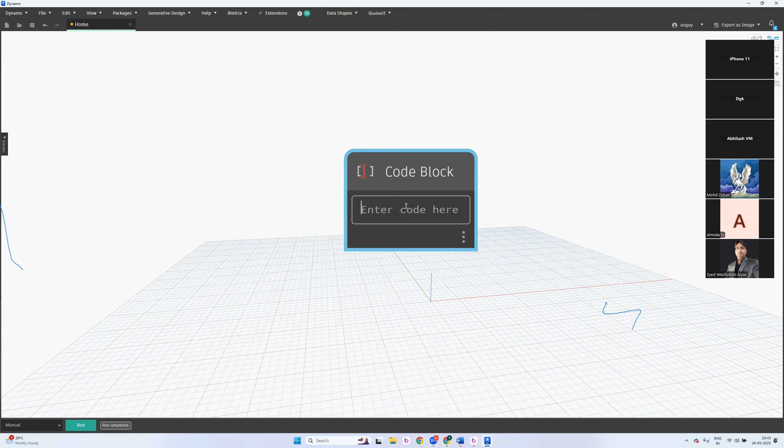Like, Rajesh, what is the logic behind this? I'm not able to do this, is there any solution? So far, from my perspective, I never say no to students for any single query. From students' perspective, they never hear no, that won't happen. I never disappoint you for any kind of concern. Sometimes I may provide you solutions for your queries as well, if I'm available.

So, 2 more minutes - what are the things? No notes, nothing, no presentations. After the training, within the training itself, I am going to share very important resource files which you can't develop yourself after the training. I'm sharing it with you like a hot cake - you just simply implement it on your live projects directly, which is worth more than a lakh. Generally companies buy these kinds of resources from freelancers, and they take almost a week to 10 days to develop these complicated scripts, 8 hours a day for a week or 10 days. So I'm sharing it with you directly, with recorded videos on how to use it and everything.

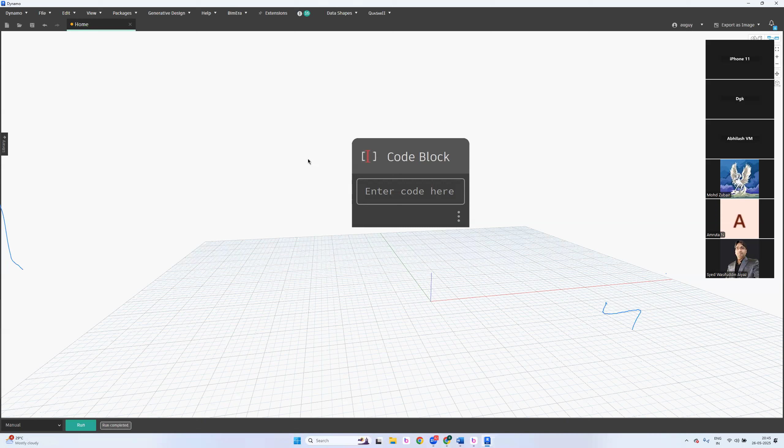I'll show you, I'll show you how to open everything. So where do you use it, where to use it, okay. I'll explain everything, don't worry. What is this, who is this, is it a paid version or a free version? It's free, it comes with the Revit installation. So don't worry about it, okay.

So are we learning from Revit or Civil 3D, or general? This is a general one - there's no different Dynamo for Civil 3D and different for Revit. The Dynamo is only one. If you learn Dynamo for Revit, you can implement the same strategies in Civil 3D as well, and if you learn Dynamo for Civil 3D, you can implement the same strategies in Revit as well.

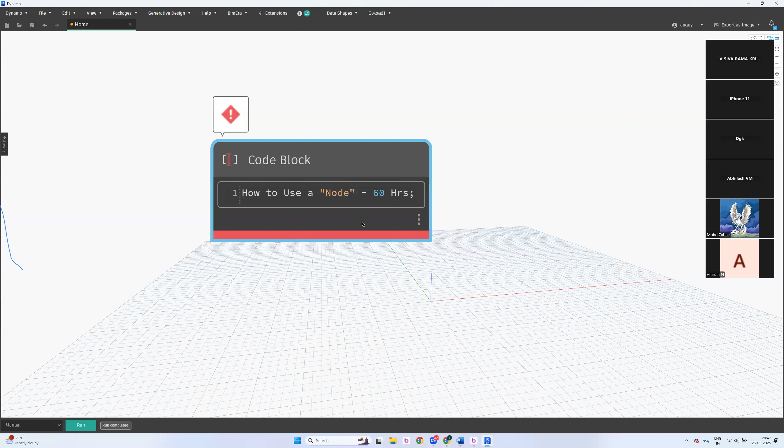So I'm teaching you a concept of how to use a node, for 60 hours. Do you believe that? I'm going to teach you only one single concept, and this concept leads to a number of sub-concepts, like 20 concepts under this. We are going to learn how to use a node for 60 hours. Try to understand how I have kept the in-depth knowledge in this entire training - one single concept you're going to learn for almost 60 hours.

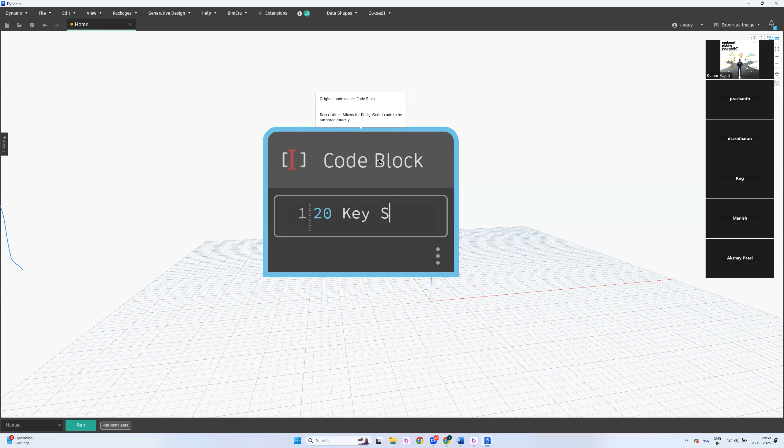So there are 20 key concepts you must learn. There are 20 key concepts you must learn.

So who is the boss for all these concepts? There must be a boss. You first understand him, then only he will allow you to play with the rest of the 19 concepts. The boss concept is data types.

The boss concept is data types. The rest of the 19 key concepts are based on the data types. This concept itself takes almost 3 days to teach you.

Actually, this is very, very basic for a computer science student. But you guys have a mechanical background, electrical background, and a few of you, I know, hate coding as well. That is the reason in Dynamo, in level 1 training, there will be no coding. Yes, we have, but it is very less code, very simple code. That's not Python, that's not C, nothing. But we have code. I'll show you how the code will be in level 1, in today's session itself. It's very, very impressive, you'll definitely love that style of writing code.

So it's called DesignScript. I'll show you some examples today.

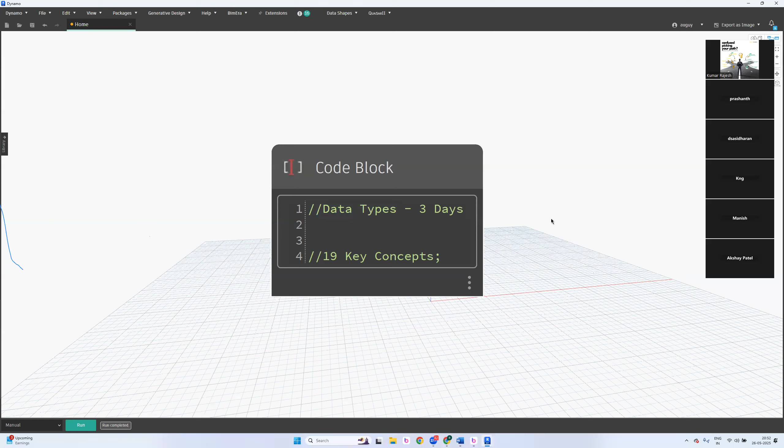So what is this data type actually? What is the data type? If you want to place an element, when I just click on any element, if I want to read the content or read a property, any data, then where can I read the data?

Is this only for Revit, or do we have this elsewhere? Is it only Revit type or instance? It's for Revit and all the tools. So it's not only for MEP, not just for architecture.

Very nice question again. Automation is not element or discipline specific. Automation is for all disciplines - architecture, structure, mechanical, electrical, plumbing, and firefighting. So if you're a Revit user, whatever your discipline, the Dynamo tool is the same for all disciplines.

I'm not just teaching you basic content again - I'm going to teach you some technical content as well. You'll come to know why, in our coming sessions.

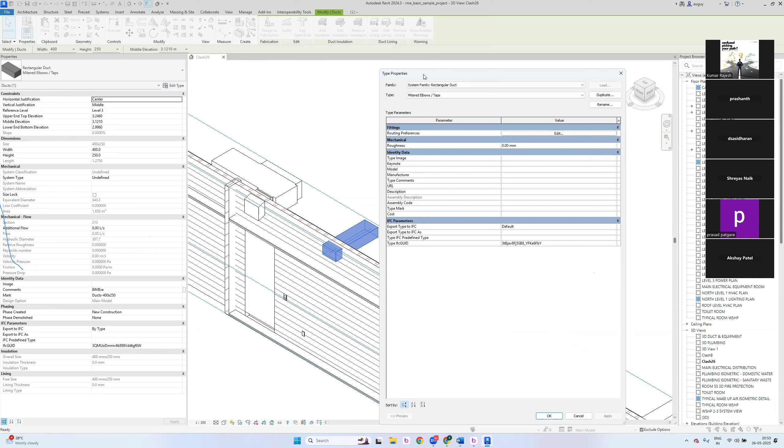So we have the properties palette and the type properties palette - this one is for instance, and this one is for type. Whatever data you read when I pick any element, it's actually not even 5% of the actual data.

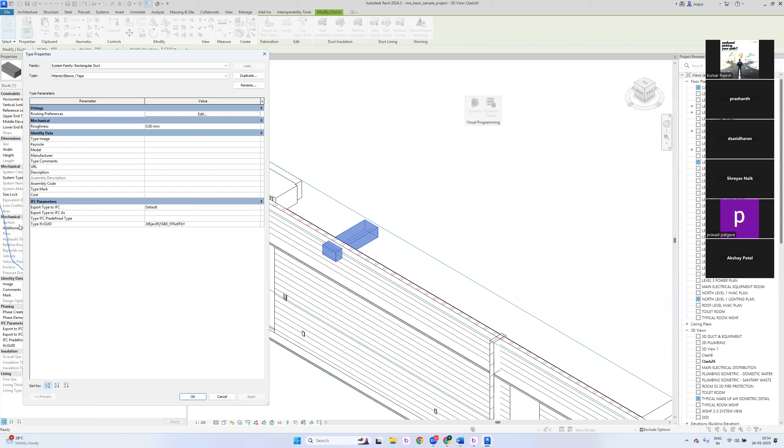Only a BIM developer can see that. Let me close this - see, maximum, how many parameters do we have? 1 through 16... maximum 20. If I count like this, from here to here it's 20, 40 - so total 60 parameters we have for one element.

But where is the real-time properties palette for a developer? For a developer, this is called the Revit Lookup Tool.

Sorry Rajesh, are you sharing the screen? Oh, I'm not seeing your screen. Yeah, we are seeing your screen - it's visible. Okay so just log out and log in again, same meeting, bro.

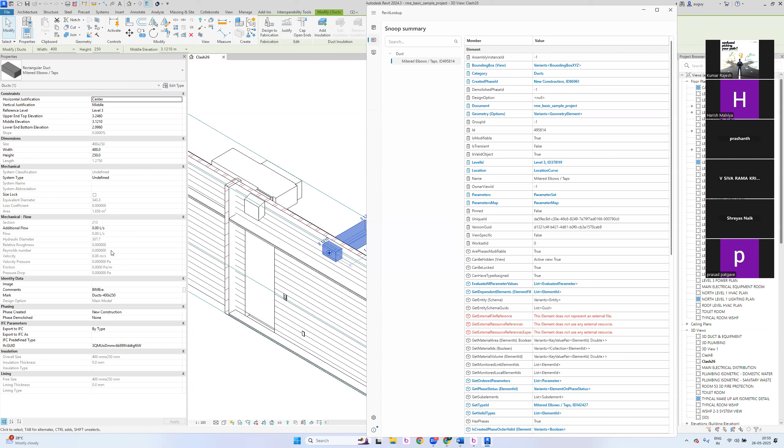So see, I don't have any - can I see the ID of an element in the properties palette? Come on, can I? No. Can I get the location information of the particular element here - the XYZ point? No. Can I get only the reference value? No, right?

So where can I get such information? Not only that, there's a number of data points. So I can see the location information - see, there is a properties palette, but this is actually a free tool again - Revit Lookup.

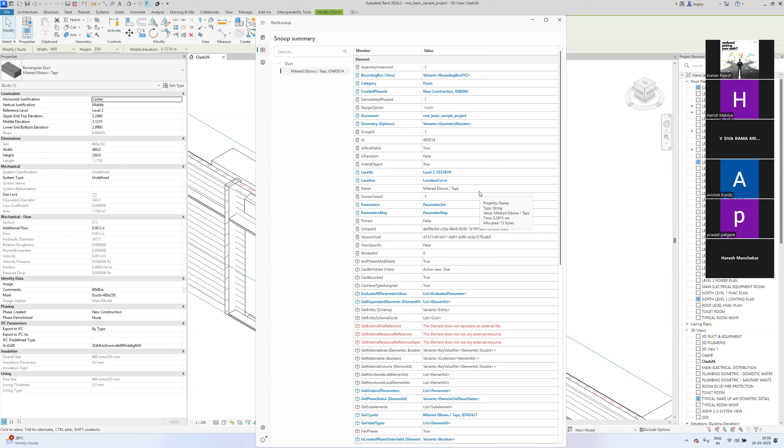Mostly you are going to use this Revit Lookup tool in level 2 training, not level 1. But I want you to understand there is another properties palette which gives the complete information from the backend. Now we are using Dynamo to fetch some information from this tool as well.

I can see the ID 495814 - so 495814, this is the ID of this element. So how do I come to know this information? How am I using Dynamo? How can I learn this?

Where is my pen tool, bro? Annotate. So this is my element - the one which I picked. If I pick a wall, it shows a wall or something. Now I picked an element, so if I want to get the ID, I'll put a dot next to it.

I'll put a dot next to it and write the parameter names. So on the left hand side, these are called parameter names, and these are called parameter values. Am I right? Correct? The same case - even these are called parameter names and parameter values.

But when it comes to this, you're not a modeler, or a coordinator, or a manager now - you're a developer. So you have to pronounce it in a different way. How do we exactly call them? They are variables - they are variables.

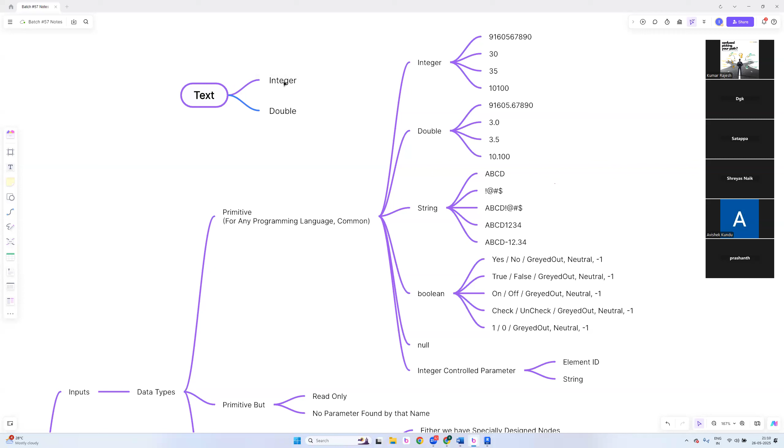So there is another data type which is called string. String in the sense text. What do you mean by text? Your name, and what do you say, name and location. Generally you just say I'm in Hyderabad, destination, something. So these are actually text.

So A, B, C, D, these are text actually. And how about special characters? Can special characters also be called a string?

Can we call special characters also as a string? Yes, ultimately. Actually, these are called ASCII characters. Even ASCII characters can be a part of a string.

So I have a text and I have ASCII characters - string and characters, string and a number, string and a special character, and double. Consider that as actually a string. I'll show you how it exactly reads. Text in the sense, we generally call the text as a string data type.

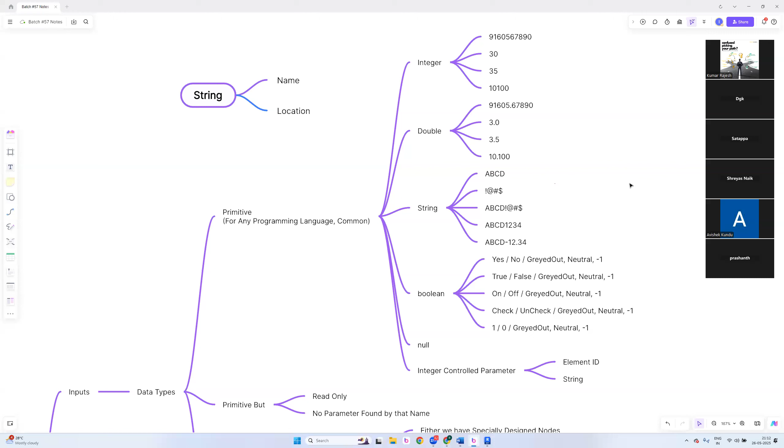And all of them can be read as a string. Now shall we get into the Revit application, Revit interface? Yes, let's. Okay, now I just picked a duct, some random duct.

Now tell me, what is the data type of a horizontal justification value? Keep on answering. String, string, string. Come on everyone, please unmute, everyone.

Strings, okay good. Vertical justification? String, string, that is a string.

Middle elevation? Double, double, double. Okay, so width.

Integer, double, integer, double - is that an integer or a double? Double, it's a double. Why? Because it has a point, a decimal point. Okay, so system type.

String, string, string. Reference level - string. Reference level.

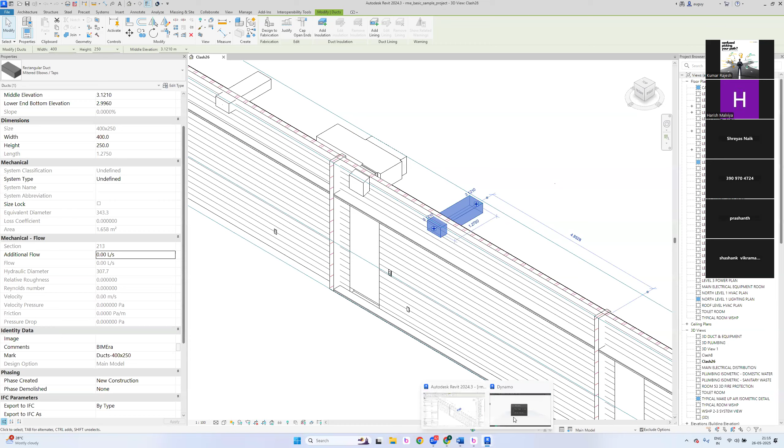Okay, generally there are two different processes, which is very important. Please mute your mics. There are two important concepts - one is get, what do you mean by get, and there is another, like set. Do you understand anything at least?

For a developer, logic is very important, whether it is the right answer or wrong answer, you have to ask yourself. When you see something, you have to try - generally people have a sixth sense. They see some posters on walls, movie posters, and they completely tell the story - this villain is going to kill the hero in the end of the movie. So they can judge that. So why don't you apply that sixth sense when it comes to learning?

You have to, especially for our Dynamo, this is very very important. The reason is, in a library we have nodes, generally a lot of nodes. There are thousands of nodes which are ready to use, free of cost. You don't need to purchase, you don't even need to pay a single rupee to enjoy all the scripts. Why? Because you are paying, so I'm here to teach you. So how do you exactly implement it?

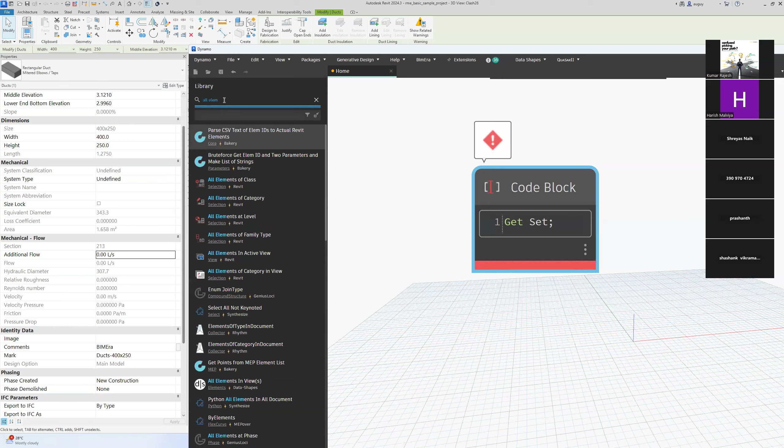So if you have seen a node like all elements of category, for example, I have a node - you have to apply some common sense. What is this node going to do? At least try to understand what is this node going to do. Come on, can anyone give a guess? What is this node going to do?

Okay, let's try to understand. So now I want you to give a pass, okay just give me a minute, I'll explain you another concept. So break it into the parts - these are called inputs, and this is an output, and this entire thing will be called a function.

Function. Based on the inputs that you are going to connect, it will tell you what is happening, and this will show you what you are getting as an output. Now I need an answer from you - what it is actually expecting and what is happening in this entire block?

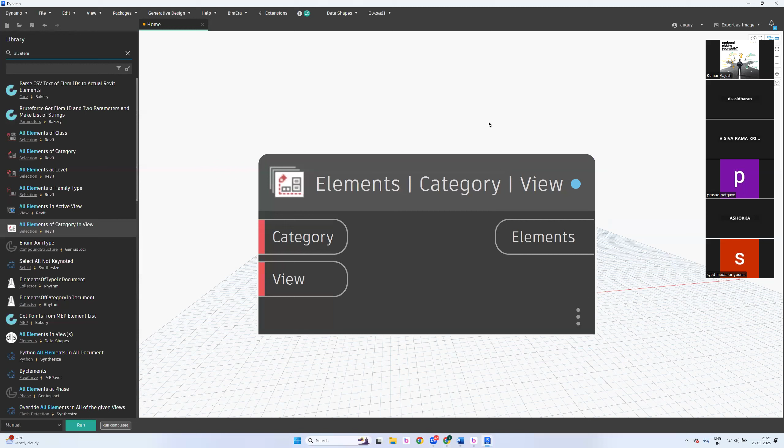So remove this off, remove this in all elements. You are going to get all the elements of the particular category in a particular view. Guys, are you clear? Yes, clear.

What is this going to do now? Tell me. Elements active - it will bring all elements in the active view. Active view in the sense the view which is currently opened. Correct? Yes, it is correct.

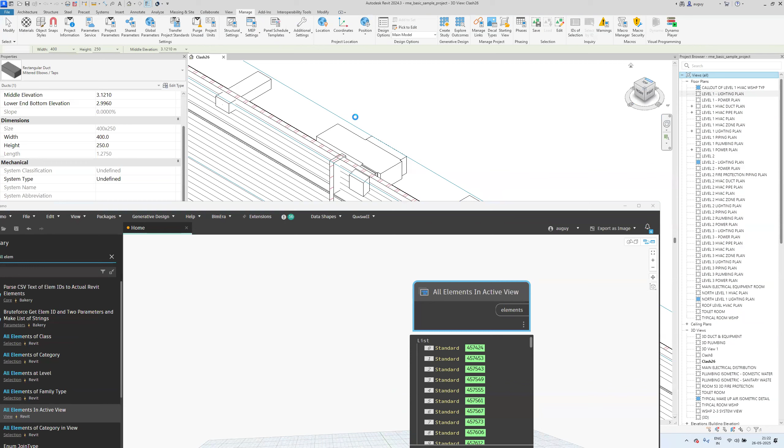Okay, so let me execute. Yes, it's saying that there are 129 elements I have in the model. Is it? Okay, I'll change my view. I'll go to the level 1 lighting plan. So there is no change in the 129 because it is still in the manual mode.

When I run this, it's changing. It's changed to 1410. Why do you have to run it - can't it read it by itself? If there is any change in Revit, can't it detect automatically? It can - if I change this to automatic, it doesn't need your permission at all.

So it is independent now. Automatic mode in the sense independent mode. You don't need - if Revit detects any change, it will send the instruction, the user, either modeler or coordinator, changes something. So can you please refresh yours? When I change this to Clash26, it's changing to 129. I'm not doing anything, I'm just switching. That's it, 1401.

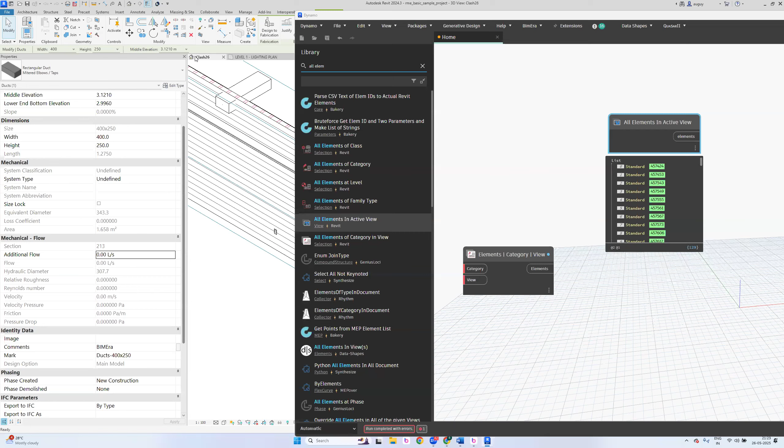It is executing the script and changing the data. Are you clear, guys? Yes, but which actually gives the best impact in the early stage?

Always set it to manual mode, because there are a number of issues. If you want to learn something in a smooth way, stop using shortcuts. We'll go with the traditional method. Just take your time to run execute. If you're really lazy, use the F5 shortcut to execute the script. But maximum, don't try to put it in automatic mode.

Okay, so all elements in view. Now what do we do? So get and set - I've set it in run mode, right? There are two important concepts, get and set. Get is actually going to get information, and set is going to set some information - from where it is getting to where it is setting the element. It is getting from an element and setting to an element.

Guys, are you clear? Yes. Are you clear, sir? Yes. Is it clear, everyone?

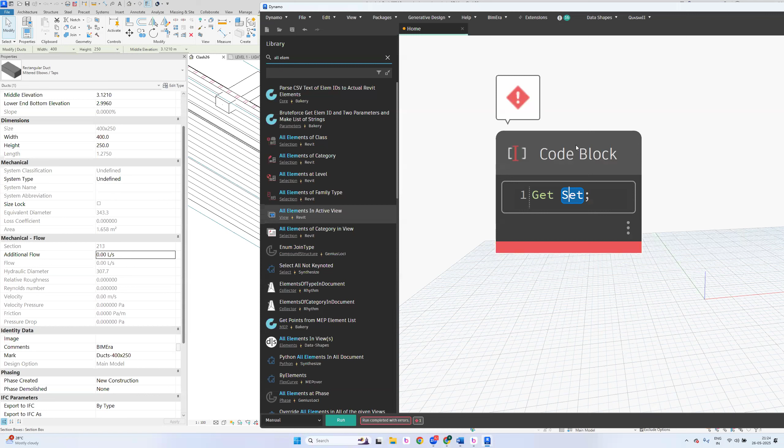So get-set is a concept we generally use in all programming languages. Get is actually just a query, an inquiry - it won't affect anything, so you don't need to bother if you're using any get nodes. But you have to be very, very careful when you're playing with the set nodes.

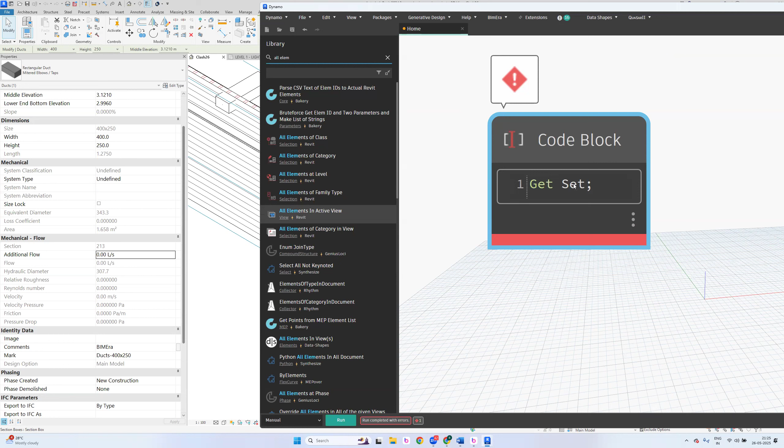Okay, let me show you. Get parameter value by name, get parameter value by name. And there's another node, set parameter by name, set parameter by name. So element dot get parameter value by name, element dot set parameter by name.

So the first one, we are not using this library anyway - we are having our own. I'm going to share that add-in with you for your friendly search. So element dot get parameter value by name, element dot set parameter by name.

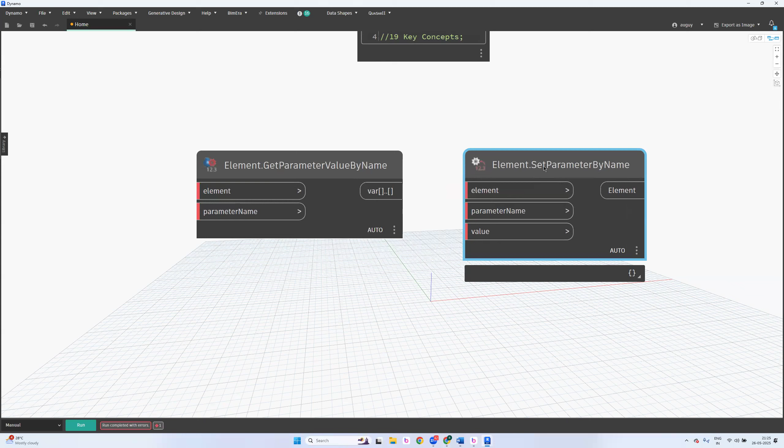Okay, good, what is it now? Can you imagine what it is actually expecting and what it is going to return? Come on, apply the same sixth sense concept. It will detect the parameter of that particular element and return that value within the parameter.

Anyone else? Prashant, yeah Satapam? Get the element ID and parameter to assign the values. If we select the elements and give the input of the parameter names, the values will come from the element.

Value from the element, okay. So the first input is expecting an element. There are a number of things to learn actually - when I hover the cursor, why is it showing Revit.elements.element? It is actually giving you a direct hint: 'Hari Baba, I'm expecting this. Please connect me only the Revit.elements.element. Don't connect anything else.'

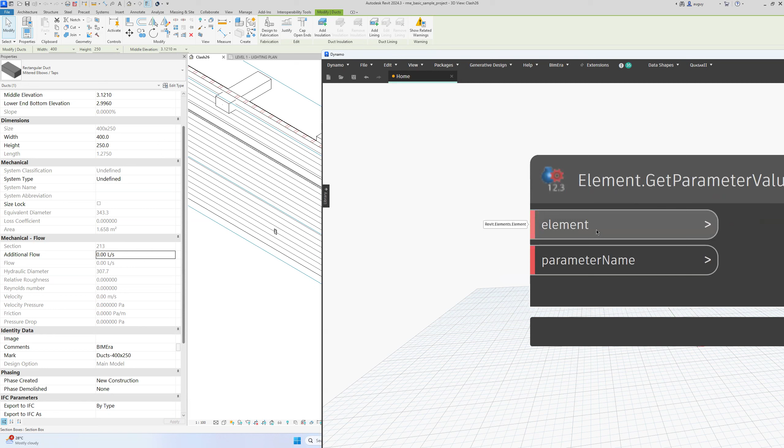So select model element - let me pick the same element, the duct. So 495850 is the element ID. Refresh - I can see that it is giving you the duct. So element to element, these both should exactly match. Since this node is expecting element and parameter name, you cannot connect this element to parameter name.

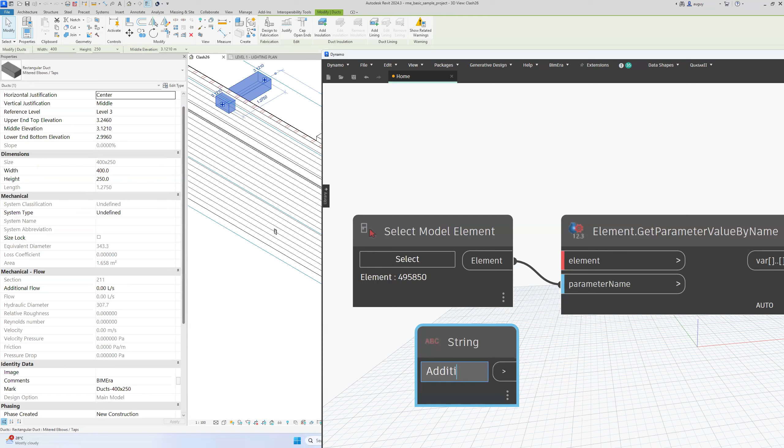Parameter names are actually strings, so you cannot connect them directly. I would like to get some additional information - additional flow, type it. It's case sensitive, you cannot connect this to this.

Run - see, there's a warning. It's not an error. Make sure you pronounce it very clearly whether it's an error or warning. Orange color nodes are warnings, and they can be fixed. Errors take time but can also be fixed. Clear? So what is it exactly saying?

Element dot get parameter value by name is expecting an argument, meaning an input. Let me explain this node - the node warning, what it's actually asking for, element dot get parameter value by name, this is the node name. So the node is expecting something. Now we are doing it, we are playing with it. 'Argument' format - expecting argument is actually a term for developers. In our style, we call that an input. That is actually the input.

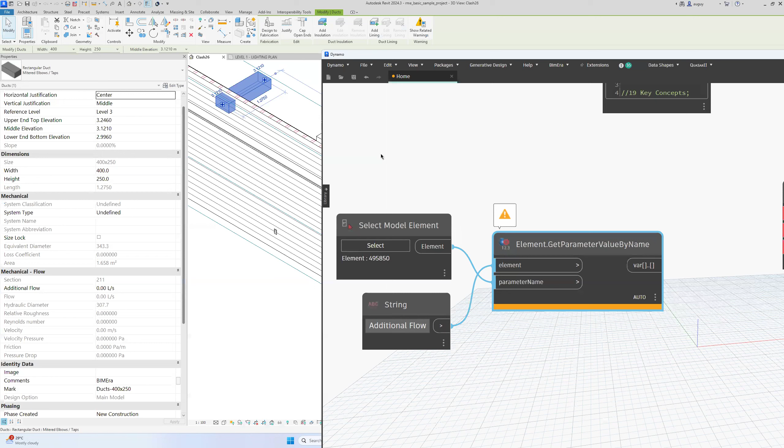So this kind of problem generally comes when it is expecting something. We used to play a game called Flames - friend, lover, attraction, married, enemy, sister, something like that - where you have to match the two things in the brackets. Exactly, apply the same strategy.

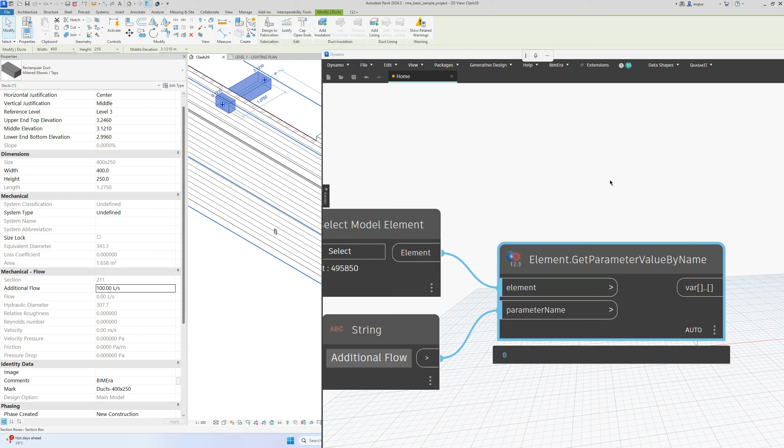The two brackets are very important, so this connects to this, and this to this. Now there will be no warning, and instead I can see there is a value 0. What if I change this value by 100? Changed it. So if I refresh on the Dynamo, I can see 100.

So what is it exactly doing? It's extracting the value from the Revit database, that element database. Guys, are you clear? Everyone? Yes, clear now.

Okay, good. Now here only one duct is there. If multiple ducts are there, how will we create that? Same thing - instead of playing with a single object, we'll play with multiple objects. So select model elements, plural. This is singular, this is plural.

Hello. Clear? Come on, come on. No problem, I'm just checking my mic. Okay, how will we identify? So in that case, Rajesh, this element gets one - the parameter value also changes because it is plural.

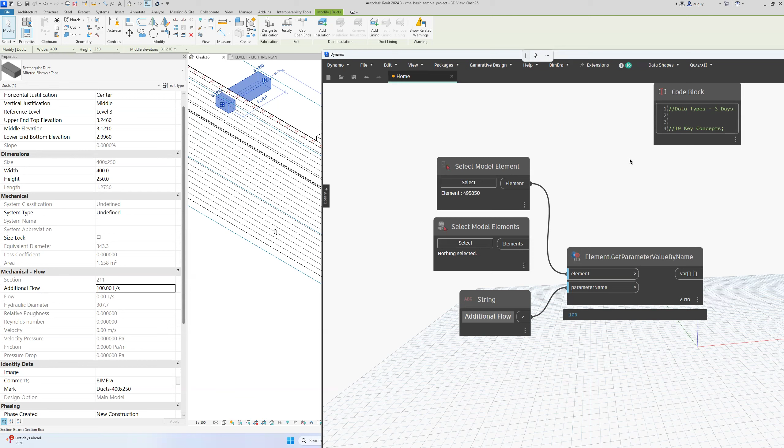It means, if I want to select all the ducts, let's turn off all the other elements, select model elements, I'll just pick all the ducts. So how many ducts have I picked? Refresh - there are 13. So when I connect all the elements to this, it is just extracting the data, that's it, from 0, 0, 0, 0, 100.

So the R element, this is 495850, which is in the 10th index number.

Yeah Rajesh, I have a doubt - see, if you drag and select the ducts here it's easy, but our project is huge now, so selecting multiple items is not an easy thing. So sometimes we get stuck. How will we select ducts like that?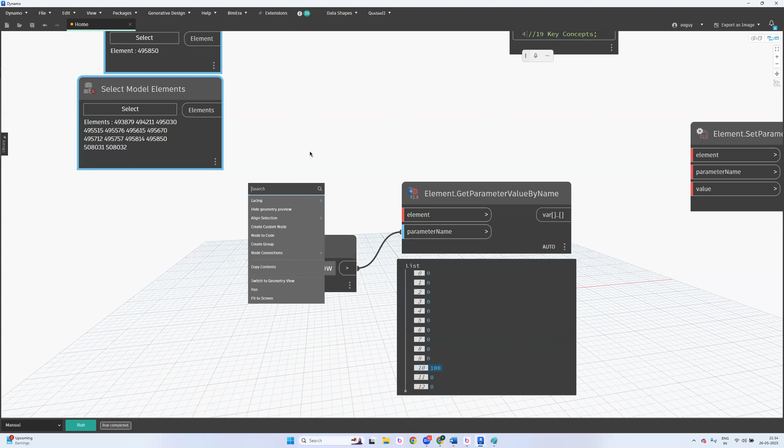Then there is a concept called element selection, bro. That is actually a 2-hour concept. You can apply a number of conditions. In your scenario, all elements, for example let's take the same thing - all elements of category, so that is expecting category.

Let me correct - categories. Okay, I'll connect the category to category, not to the view. And it is expecting views, so pick the views. It's very simple.

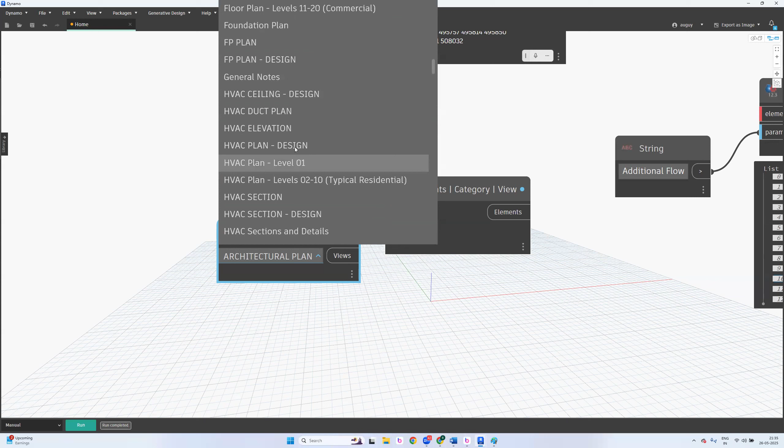So in architectural plan for now - just for our purpose, not architecture plan, you can't see that. HVAC plan, where is the HVAC plan? HVAC plan, HVAC duct plan, okay I'll just pick it. And then what should I do now to see the result? Refresh.

Category, what is it saying? Element view ID is not specific. I'll just change this to HVAC plan design. Refresh. Still not. Now there are no such views actually, so there's nothing in it.

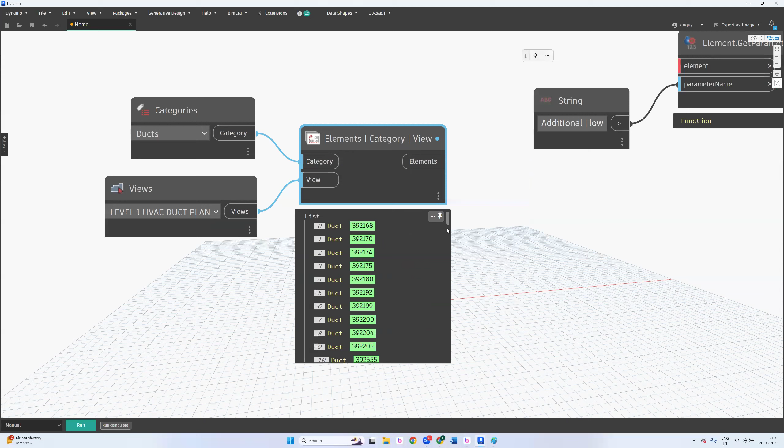So I have got a total of 252 ducts. Is this clear? Yeah clear. You don't need to do anything, you simply connect these two elements and understand. Run the script - these nodes are there, right? Category, views, element category. String - these are there, right?

These are visible in the Revit Dynamo, or do we need to buy external add-ons? These are all default - I'm not going to teach you any kind of external packages. Generally in the library, we have two areas. From the beginning, from the dictionary till add-ons, I mean till units - from here to here, they are all default, bro.

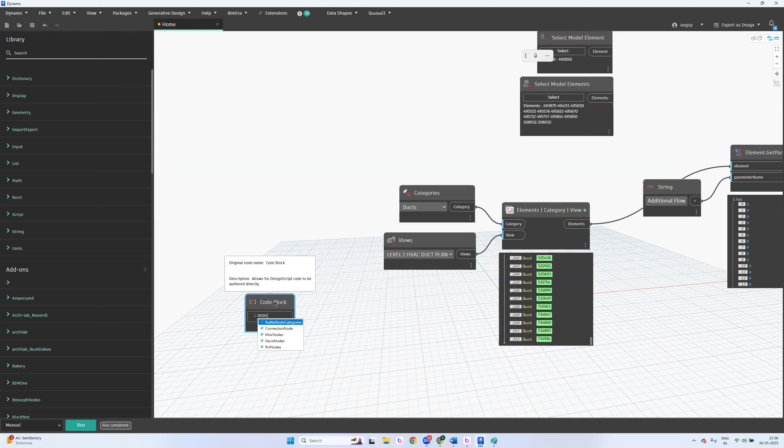So we have almost like 3, 4, 5, 6, 7, 8, 9, 10, 11 folders. So with these 11 folders, in a folder we have some different files, I mean the nodes. We called it a node - node in the sense, no code.

We'll simply call these nodes. So there are n number of nodes, and as you've seen in the add-ons, there are n number of add-ons I have installed. Without add-ons, you cannot finish a script confidently. You must have these add-on packages. And they're not paid packages, they're free. I'm going to share all this with you.

Are these packages pre-installed, or do we need to install them manually like a library? There are two ways of installation: one is time-taking, and the second is a one-time installation, just a single step. You just copy and paste into a particular folder and you'll get complete access. I'm going to share this with you and explain exactly where to copy it.

Clear? Thank you. Excuse me, Rajesh, I have a doubt.

Is there any limitation for the number of elements for the selection? It depends, you can go with n number. But that was a nice question.

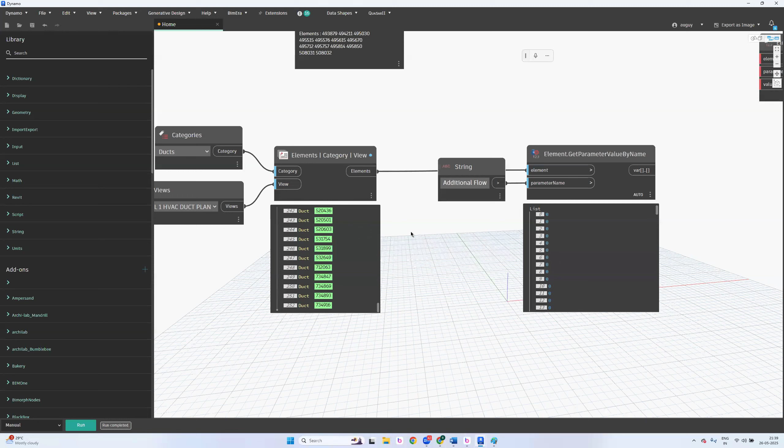In such cases, what we do is we don't use Dynamo. We write our own script in Python and execute it. If you have huge elements, Python would work much faster. You'll come to know the technical reason in the training, why Python is faster and why Dynamo is slower. Practically you will see, I'll show you why it is faster.

Shall I continue the session or do you still have questions? Since it's the first day of training, no problem at all, you can ask anything. For the first week of training, you can eat my brain, but understand each and everything very clearly. Because if you have something running in your mind, you can't focus on what I'm actually teaching. Even if it's valuable content, your mind will keep roaming over there. So clear your doubts.

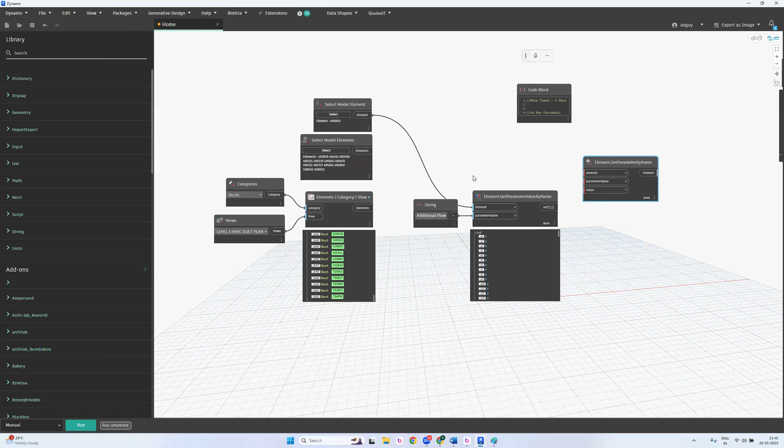So this is actually Get, in the sense it is extracting the data. But what about Set? I got the value, first let me play with a single object, run. So that is 100 liters per second. Now I want to change this. If I want to change it, do I use Get or Set? Set.

What is the difference between these two? You have to answer yourself. Whenever you're dragging a node onto the canvas, judge yourself: is that an action node or a query node? This is actually a query, meaning an inquiry. Query in the sense it won't do anything, it won't harm at all. We generally call Get nodes 100% safe nodes. Whether you use 100 or 200 of them, they'll just pull the information and give it to you, simple, they won't harm you. But when it comes to Set nodes, these are called action nodes, they directly play with your elements, so they are very risky nodes, 100% risky nodes.

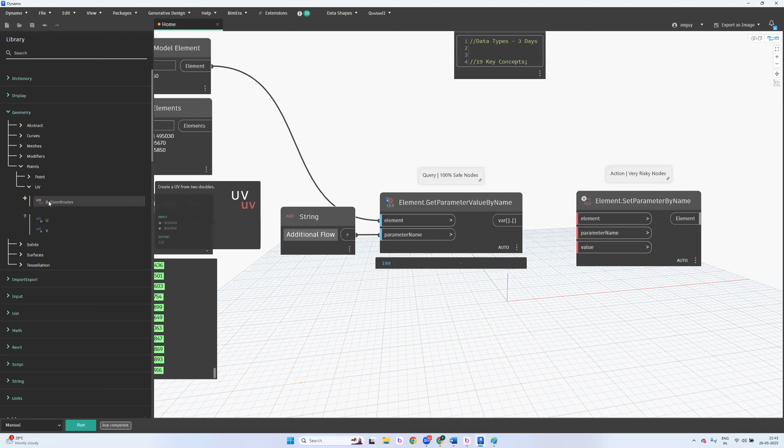But when it comes to action nodes, like the ones under the zap icon, this is an action node, action node, action node, query, query, query. So I'll go to the UV query nodes, and there are no action nodes, we have create nodes. So what do you mean by create? You can create something which is not there in Revit. We don't have a third or fourth category, we have only three categories: query, action, and create.

So we have three sets of things. We are going to play in detail once the real training starts. It's going to start from the 27th, 28th. From the 28th, where most people will fade out. After this 2 days training, the real training starts. We'll have a lot, you're going to learn thousands of tips. Trust me, you would be able to digest it.

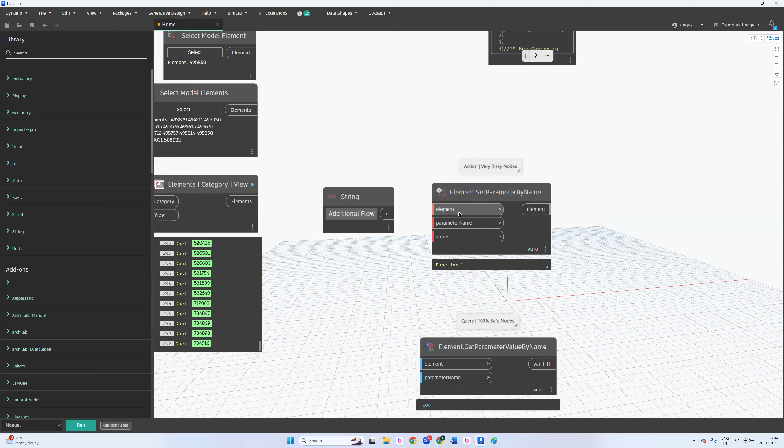Simple, okay, so get and set. Now how to play with these elements? If I click on this, it's going to be deselected again. So I would like to move this aside and bring this here. That is the expecting element, I will connect an element. I want to play with only a single duct initially.

And it is asking parameter name. Which parameter name you want me to use? I'll just connect this to this. What about value? It is asking the value to be set. Which element is that? I think this one.

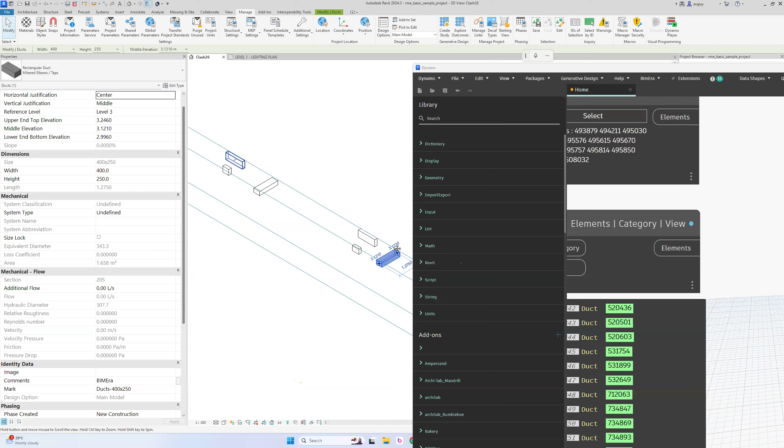Manage, right side selection. No, not this one. This one, huh, the 100 one, the 100 value. Right? I think maybe this one. No, yeah, this one, correct? Okay, this one, so the value which is having 100.

Now, the value I want to set, what is the data type of it? What is the data type of additional flow? String. Because there is a number and a text also, correct? Very good. So string in the sense, if you feel it is a text, don't call it text, call it string. So instead, wherever the value actually is, you have to connect it accordingly. So I want to set 150.00 space capital L slash S. Okay cool, let me connect and run the script.

Warning, bro. What type of warning is this? The parameter storage type is not a string. How come, are you sure that's a string? I think it's double actually. Why? Because the unit in Revit is by default shown as that unit separately, but by default if we put any value, the unit will show by default. I think that's the reason.

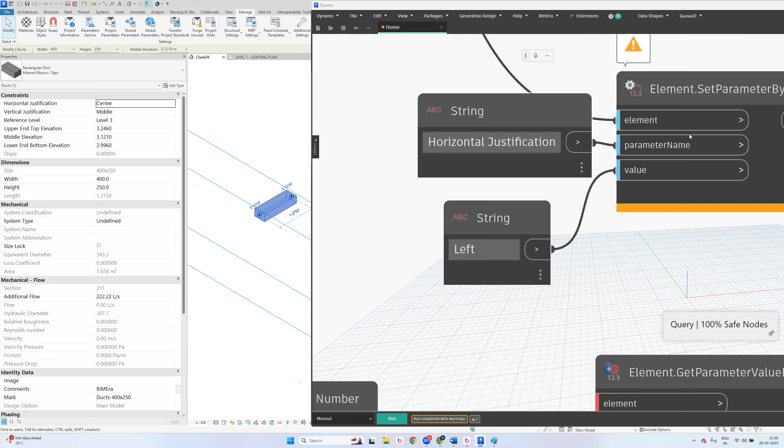Again, a warning: the parameter storage type is not a string. Then what? Is it a number? No. Correct? Obviously it must be a string because it is a text. But it's clearly saying I'm not a number, I'm not a string. The parameter's storage type is not a string.

Okay, I'll show you something. Number - I'll set it to 0. Will this work? No. So what will be the problem? What if... are you idiot? It is clearly written that it is center. How dare you connect me a number? Yes, is it clear? So when I refresh this...

There is no such warning. Okay, let me try 1 and refresh it again - it's set to left. If I change this to 2 and refresh again - it's set to right. What if I change the value to 3 and refresh? Maybe it will take it in order: left, right, middle. Okay, well now when I set value 3, it's empty. So when I set value 4, still empty, nothing.

Why? How come it's like a numbering system? Zero - how is it accepting it as a number? Okay, suppose as you said it is in an order. If I set 0, is it picking up the first option? When we picked that, and if in the notice list it is picking up the first one, correct? So if I set a value 0, which is taken as center, when I set value 1, it's taking left, when I set value 2, it's taking right. What is the logic behind it?

This is not even taking it in order. Then what else? Come on, you can definitely answer this. Straight away - alphabet goes to the start of the list. It is considering alphabetical order. Correct? C comes first, so 0. L comes next - L, M, N, O, P, Q, R. So L is next. Right, true. Are you clear now?

So sometimes when I set a value of 3 to anything, it clearly says it can't find anything in the 4th position, because Dynamo - or really, almost all programming languages - are zero indexed. Zero indexed system. This starts with 0. So if you have 3 objects, it means 0, 1, and 2. If you have 100 objects, it's 0 till 99. Is this clear?

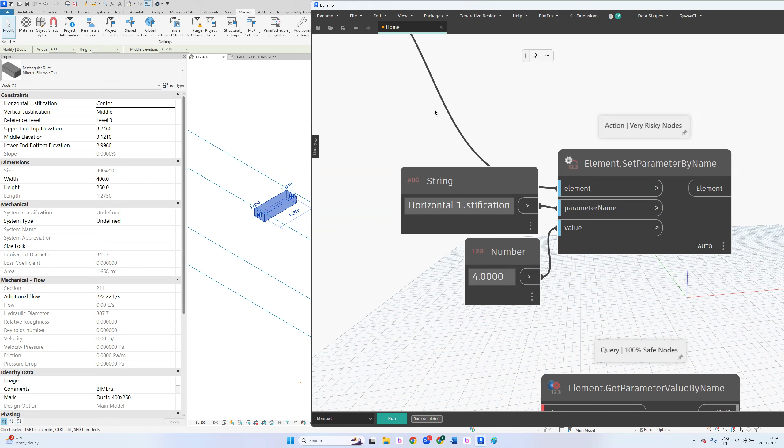Okay, cool. So now in such a case, it clearly shows like a string, but actually it is not a string. So how do I come to know the actual data type without trying all this? There are a number of parameters - I can't sit and do this one by one. There is a tricky part, and I'm going to explain that trick on the 28th, so wait for that. Meanwhile, we'll cover a lot of things. Are you clear with this?

So can we actually create a family using this Dynamo? Yes, we can create a family, but I generally don't suggest it, because you have to use this the right way for a family - you should save your time. I hope you are aware of VLOOKUP, correct? In most families we have lookup tables. How many of you know about lookup tables in families? Amrita, you? Yeah. Dipil, I hope you know that too.

So if your family is such a kind, then you can go with Dynamo. Or else, if you're from an architecture background working with facades - facades generally need points, so based on the points you create such families. This family needs to be set exactly to the corner points, so you can develop adaptive families and use it. But for example, if you want to create electrical or mechanical equipment, or a generator, I personally don't suggest using Dynamo for any reason - instead you can do it using Revit much faster. Don't think automation will create everything in just a matter of seconds.

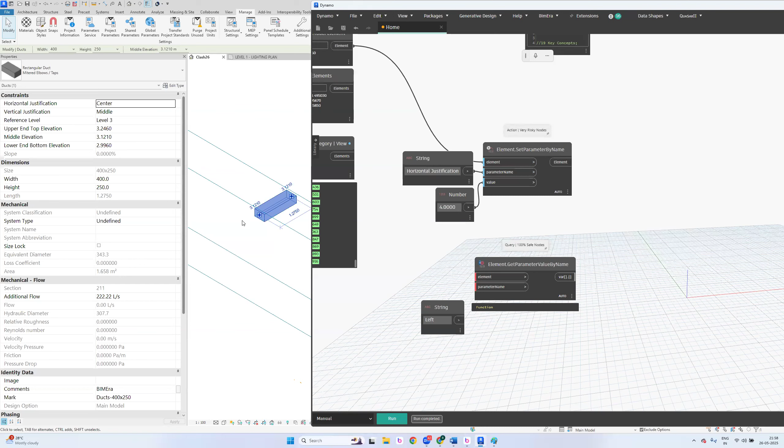Clear? Can you please give us simple and practical examples where we can use this Dynamo? Very simple, bro. For example, extracting BOQs - no, no, no, they don't need any geometry knowledge. I'll just explain it to you.

So I have all the ducts. Let's consider I have the ducts. I want to count how many supports this duct exactly needs. So for 52.710 something, it means it's 52 meters. So 52 meters, how many duct supports are required? If I consider every 4.5 meters, I need a support. My engineer has given me an input: for every 4.5 meters, please place a support. Is it clear? So how do I calculate that?

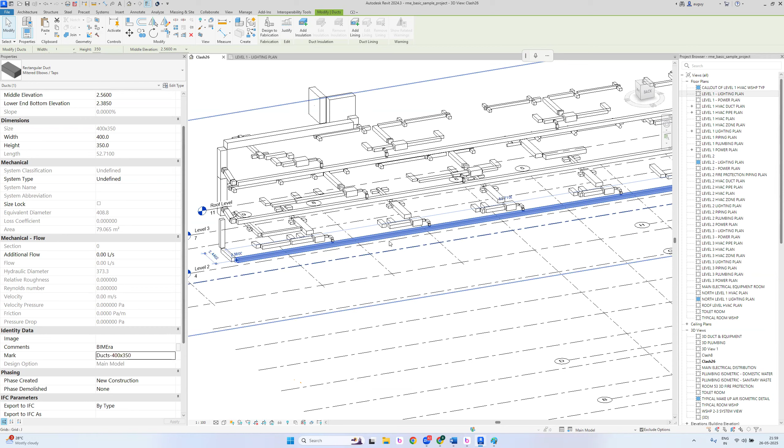So the basic calculation is 52 by 4.5, and the number has to be set in the comments parameter or mark parameter somewhere. Correct? But where do I get the exact location? So 4.5 meters here, 4.5 meters here, 4.5 meters here. So to place the points, I have to split those ducts. I have to understand where, for example, very simple - we are already having the ducts node. So element dot get location.

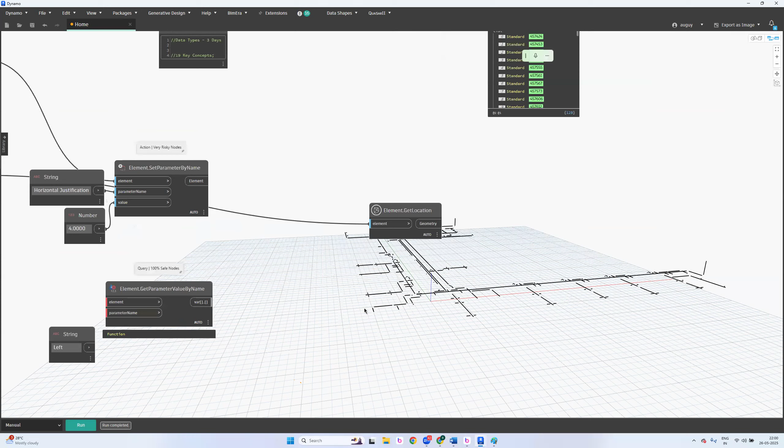Do you see that? Guys, do you see this? So I got the duct lines. This is an actual line. So this is a line, this is a line, this is a line. Now I have an engineering input from my engineer: if the duct is more than 9 meters, just place a midpoint.

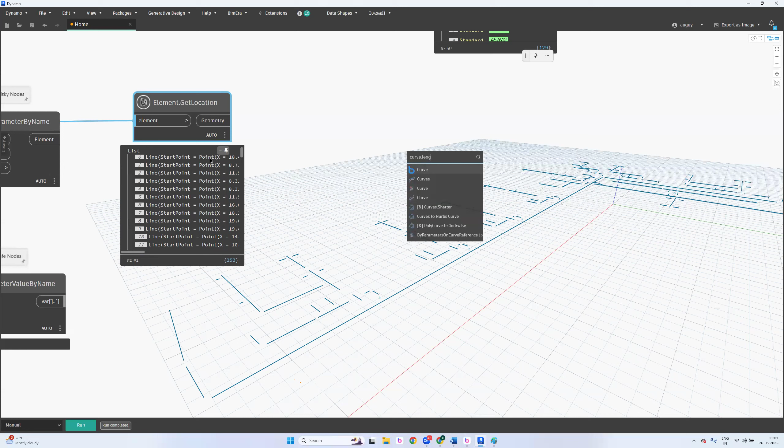So I exactly calculate element dot get location. So I got the length information in the end of it. How do I extract the length information? There are parent and child concepts, grandparent and child concepts, a number of them. So I'm using curve dot endpoint orders, curve dot length. Let me connect this to this. And it's giving me the complete length information.

See, I'm not playing with any geometries, I'm playing with the data. I'm extracting the data - even from day 1 till day 30, you are keep on playing with the data. So if you want to play with the data, you have to understand the data types very, very seriously. Now, I need all the ducts which are bigger than 9 meters.

So I'll use an operator, that is a logic. You have to tell your Dynamo: can you please get me all the ducts which are bigger than 9, bigger than in the sense greater than. So I have a number, I have a list of numbers. Can you please cross-check with a number which is bigger than 9? So this is going to give you a list of Boolean values.

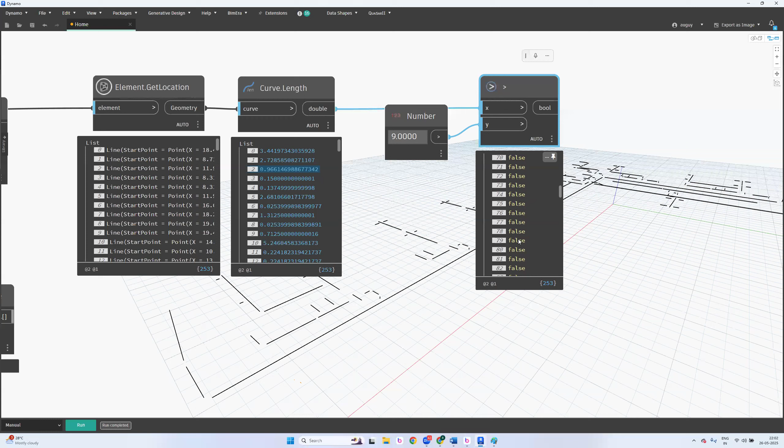Boolean in the sense, we are going to cover that data type in this one. So 3.44 is not greater than 9, false. 2.72 is not greater than 9, false. 0.966 is not greater than 9, false. So where can I see true here? Most of them are false, but we have lengthy ducts as well. So 178 is true. Let me check 178.

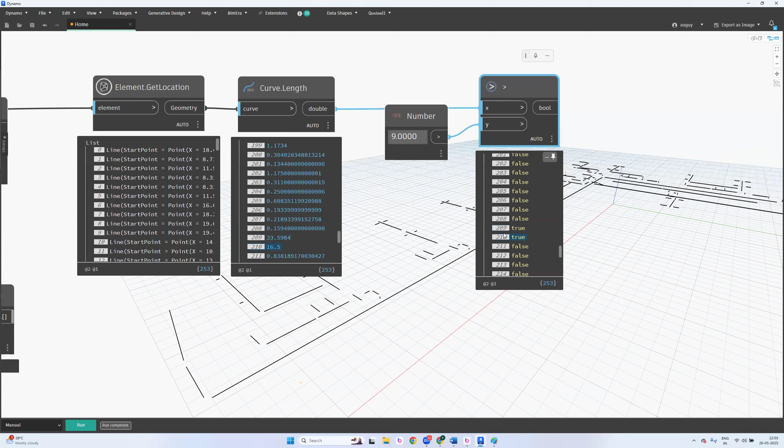Okay, fine. Now, how do I filter only the true elements out? I'm going to filter it now. There is a node called filter by Boolean mask. So when I connect it, it is expecting the mask, in the sense Boolean values. And where is the list? I will pick that particular ducts.

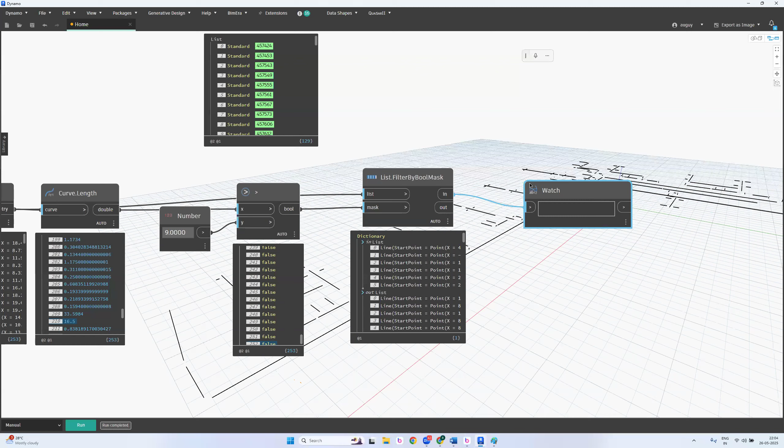Refresh. I got, there are a number of lines now. I'll just watch this, connect this to this, and refresh. I think even this is hiding this as well. Okay, anyways, so when I pick this, these are the lines now.

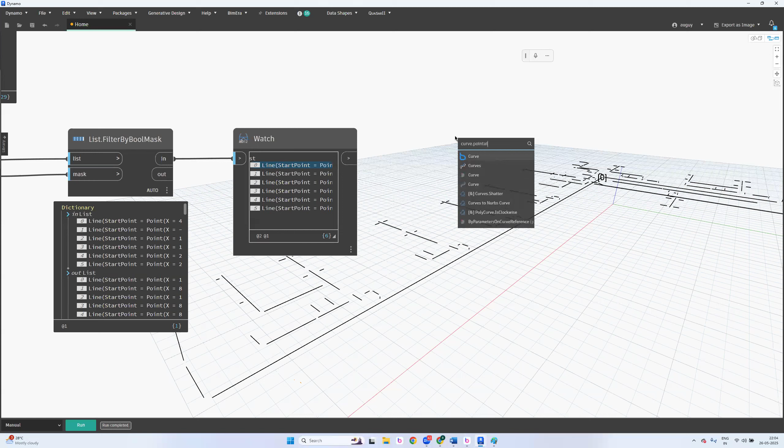Now I want to place the midpoints for this. So curve dot point at parameter. I'm asking, can you please place a point at the particular parameter? Curve dot point at parameter, curves and parameter. Midpoint is called 0.5. If I refresh this...

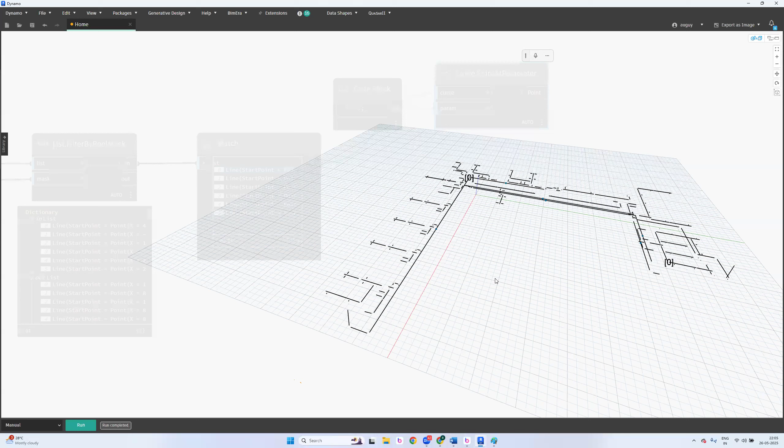Can you see the points which are placed here? Can you see the points? Here is a point. Yes, and there is one point here. There are 2 more points here. There are 2 more points here. Noticed? Correct? So to understand this terminology, you need a geometry.

You need to understand the geometry. Not exactly like 0.5 Rajesh, I need 3 points actually. I need 2 points, and some specific, like I want you to start with 0.25 and end with 0.75. So refresh.

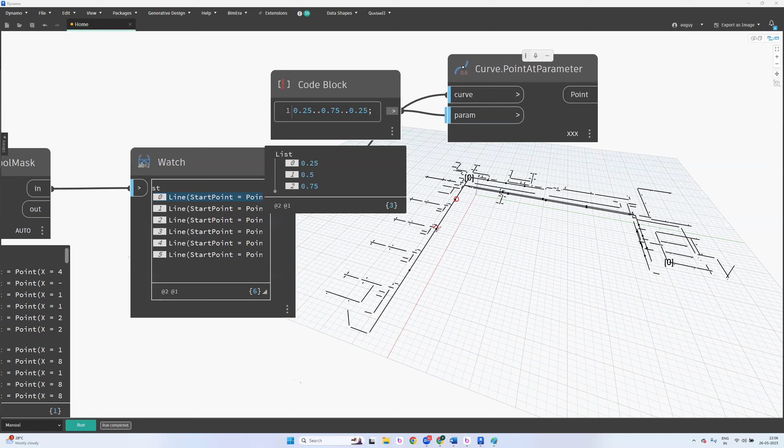I need 3 points, so I want you to place here, here, and midpoint. I'll just refresh this. Refreshed. If you have seen this, can you see there is lacing? Can you see 1, 2, 3? Are you clear? Yes. 1, 2, 3 points, and again 1, 2, 3 points. Again here, 1, 2, 3 on one line, 1, 2, 3 on another line. Are you clear?

So to understand all this, now I can use these points as a reference and dot by point. See? Oh, not this one. See, there is nothing, this is not a rocket science. To be frank, it is very, very simple. But you should know like how to exactly use it.

So point to point. Now the family type, if I have a support, I'll pick that support from family types. See, this is expecting family type, I have a family type. I'll pick that particular support and connect this to this. Are you clear, everyone? How simple is this to place a support? Clear. How simple is this?

Cool, no? So you don't need to struggle a lot, but the people used to post on our LinkedIn that placing supports, they feel that it was a very complicated script. But if you understand that geometry, you can do all these things. You can split the ducts at exactly the points. You can do a lot of things. This is very, very basic stuff. Frankly, you can do a lot of things when it comes to, after the training.

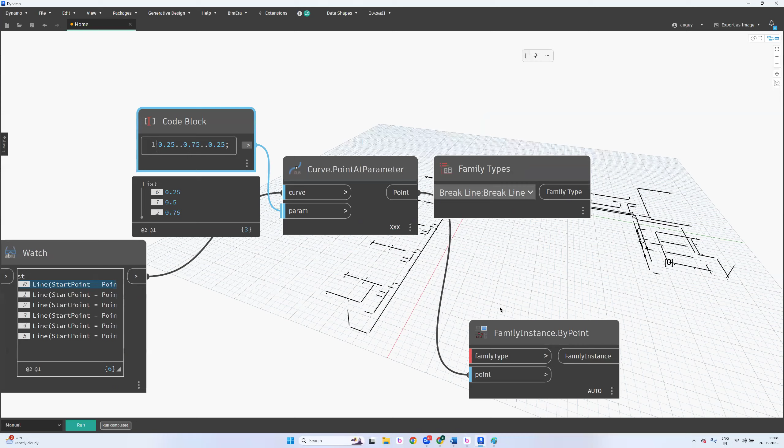Yeah, this one. Why do we need to give 0.25, 0.75, 0.25? That is actually, for example, I have a line, bro. Okay, so generally in geometries, for example, let's consider this is a wire which is 15 meters. So it is 0 and this is 15. Correct? Yes. Everyone, is this clear? But when it comes to geometry, we don't consider this as 0 and 15. So the first edge will be 0 and the second edge will be 1.

If this is a triangle, so if it is 1, the other end will be 0. If this is a 0, the other end will be 1. If this is a 1, the other end will be 0. If this is a 0, the other end will be 1. It's the same thing like a loop.

Now, what if I want to get the midpoint between 0 and 1, what is the value supposed to be? 0.5. So I'll place it here. So if I pick 0.25, where is it? Yes, here it is. Are you clear? If I want to get the midpoint of these two, then what is the number?

Are you clear now? Yes, that is what I have written. Are you clear? Right, okay, this is called sequencing.

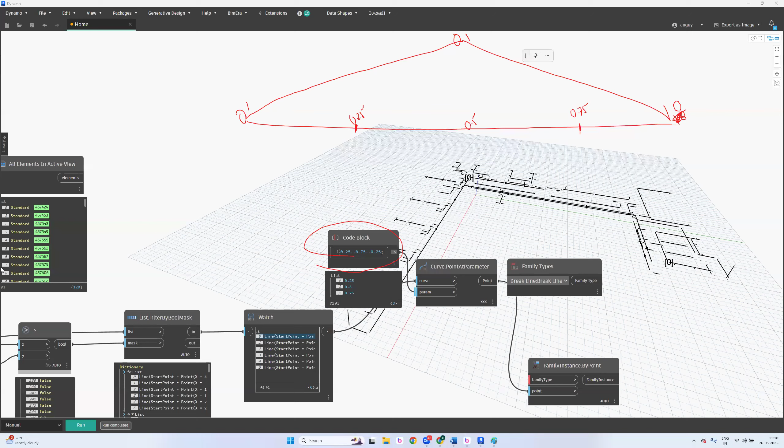Mostly we'll use it in the geometry, so you will learn all this in the design scripting. This is not a part of Dynamo, it's part of the design scripting.

Well, so now, data types concept isn't over. We are going to discuss it again tomorrow. We are going to play with what is the Revit specific data types. So these things, okay, Boolean we haven't.

We are going to cover this Boolean today, and then I'll show you how we'll create such parameters and how do we understand all this. Then tomorrow we are going to play with application specific. Very interesting. We are not going to play with this anymore because you already got used to, habituated to it. So you'll know it by heart simply.

I mean, since you can understand what is an integer, I hope you are clear what is an integer and double and string now. Everyone clear? Yes, correct.

So Boolean in the sense... one minute bro, yeah continue. Deepil, tell me the negative values where we can consider. Don't ask me now, we'll see that later, okay. Not now, because negative value, you have to understand, you will understand in a day 4 session.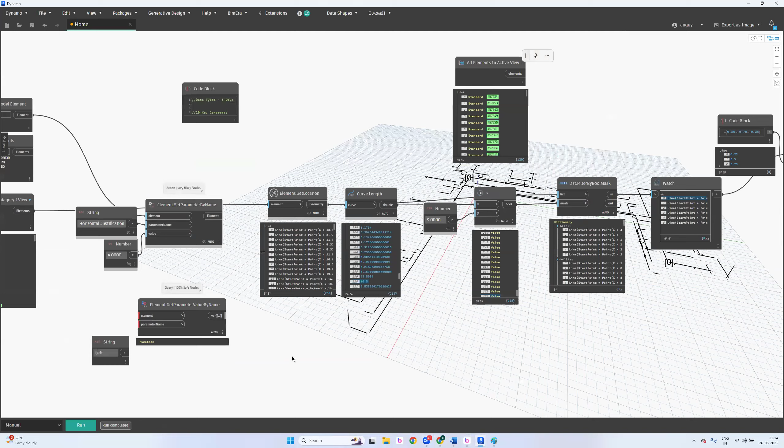Sometimes it is not even a string, it is not even integer controlled, there is another type. Got it? So for example, this reference level. Let me try, I'll just show you. So where is it? We'll try this.

There are no connections, no? Okay, what is that, reference? No spelling mistakes, reference level. No, I want to set a value since I know that is the drop down. So level 1, level 2, level 3. I want to set it to level 2. So tell me, is that a string or an integer controlled?

Come on, which node I should pick exactly? And should I connect to this? Come on, tell me. String, number, string... okay I'll try this. No, both will not work. Level 2, let me try, refresh.

It is saying that the parameter storage type is not a string. Okay, but see, already they mentioned level 1, 2, 3 like that now, so they will take it order wise, 0, 1, 2, 3. What happened? Order wise, 0, 1, 2, 3. Zero. Aravind, you are disturbing my screen, man.

Let me disable annotation for this. Okay, so level 1, let me change this to 1. Connect this and refresh. The parameter storage type is not a string. Deselect this and refresh this. The parameter storage type is not a number.

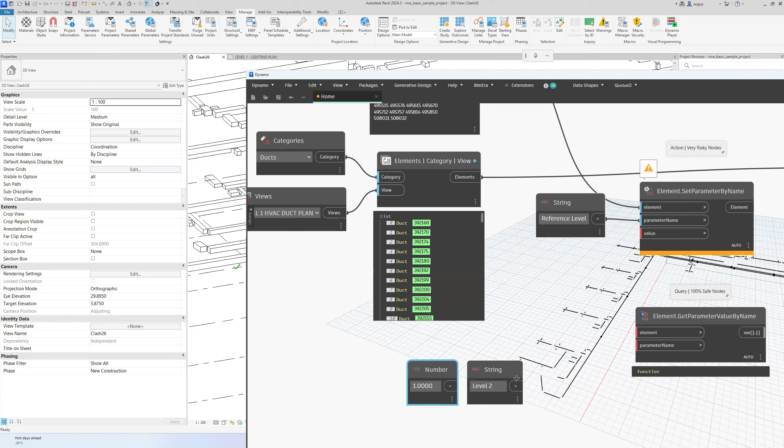It is not even a string, it is not even a number, I mean it is not even integer controlled. Then, so whenever you read any string, I think this one.

So whenever you read any string, I mean whenever you see any parameter, it looks like a string, it is not a string. Sometimes it may be an integer controlled, sometimes it may not. If these two cases are not, then what is that? That we'll see tomorrow, okay. Suspense, episode 2, we'll see it in episode 2.

Okay well, yes, so what is the Boolean type? What is a Boolean type? Boolean in the sense, like true or false values.

True or false means true or false in the sense, yes or no. Someone asked me what is a negative number, what is a double negative number? So you see that here.

The negative number we are going to discuss later. Yes or no, true or false, on and off, check or uncheck, 1 or 0, even be considered as Boolean values. So here in Revit, this log is the checkbox.

Correct? This is true value, this is false value. Yes, no, check, uncheck, on, off, true, false. Guys, are you clear? Are you clear?

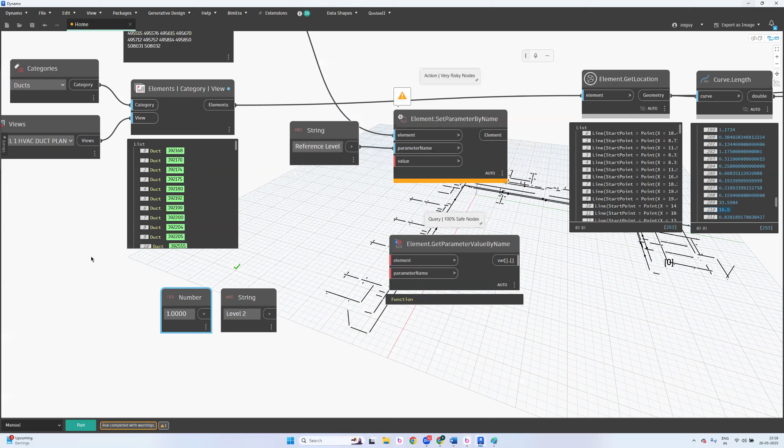Okay, so do we have any other Boolean type parameters here? Boolean data type parameters here? Come on, do you have any? There is sunpath, crop view. Do you have any Boolean parameters here?

Can we say top offset? Because it's in minus. No. Top offset is 0 minus 0.30. It is a double. Base is attached.

See, negative numbers are not Boolean values. Negative number, especially -1. Instead of showing some value, it shows -1. I'll explain when exactly.

Structural will be the good example. Room bounding and structural, room bounding and structure.

Yes, good. Now, what you have to do, your practice for today: pick any element in your own discipline.

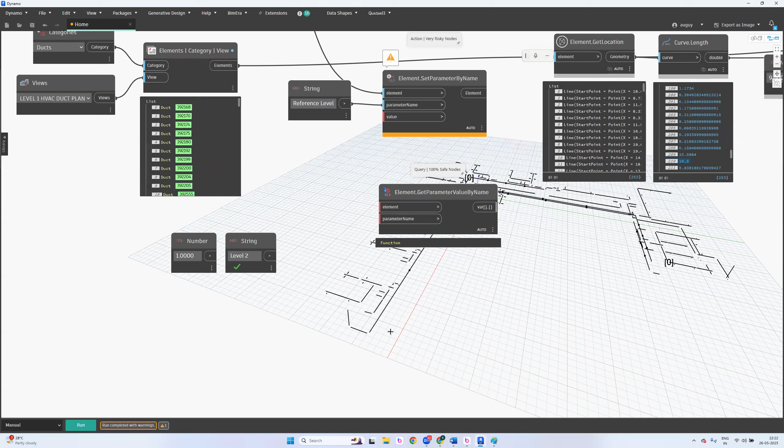So what to do? Element dot parameters. I don't want to explain this, but I'll give you a source code.

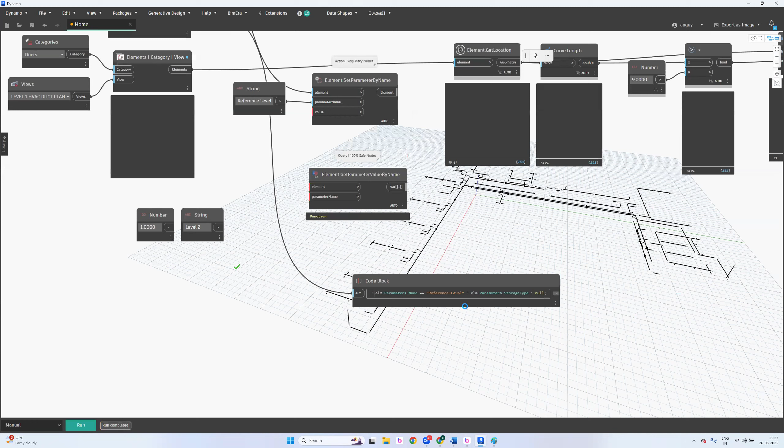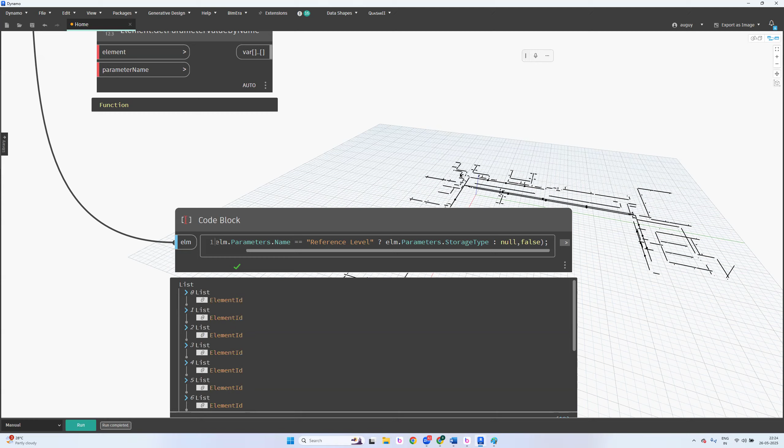You are going to write all this without any doubt, it's very simple. Okay, you are going to write all this. So, did I connect elements or element? I've connected.

Okay, cool, so this is how you have to write. Now, if you want, first you check yourself. And then pick any element, for example a wall. If you are from architecture background, select any element.

So how it exactly looks like? String, correct? Yes, correct. So you write it here in this. It looks like a string, but you simply write the location line parameter in between the double quotations.

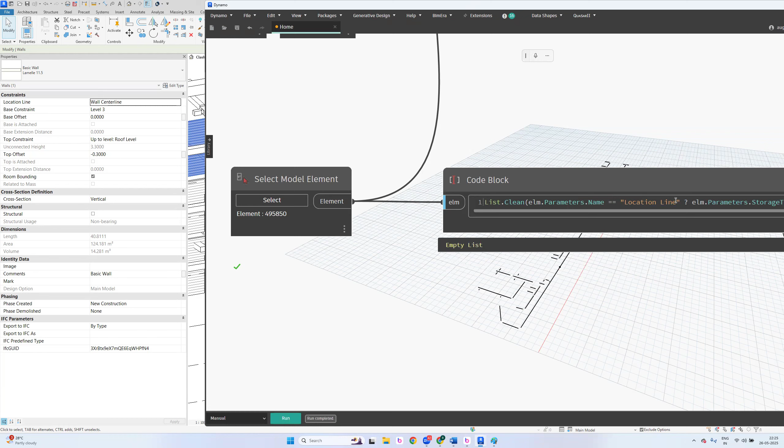This looks like a string, but actually it is an integer controlled. Are you clear now? Guys, are you clear?

Fail as many times as you can, but you will come to know exactly how to read a data type. So fill it in, don't play with any other. Rajesh used only duct, so I'll also try the duct. If you're from an electrical background, don't pick a tray or light or electrical fixture or anything.

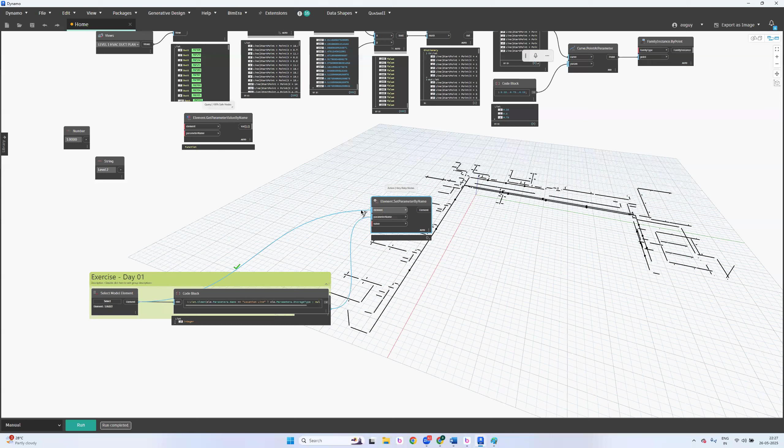Right. I'm sorry. Get parameter. The parameter.